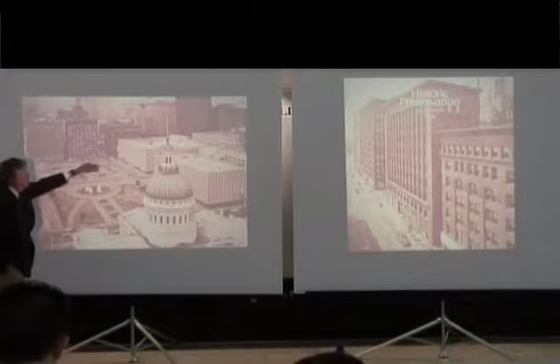And this is a great 19th century courthouse, two existing buildings, and they were scheduled when we came there in 1984 for a jury to see what to do about this building. These were slated for demolition, as was this one right there. And the very first thing we all said to the town and the state, because they were both involved, was don't touch those buildings, don't tear them down, leave them there.

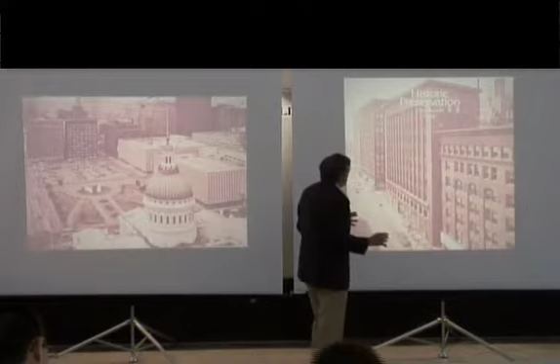Sullivan's building is meant to be seen in relation to buildings like that. It's meant to be seen, imagine it must be full of, you wouldn't see it this way. You'd have big buildings like these here, you come through there, and there it is, and you see it as a block. You see it as a chunk, and it fits right into the street. And it needs the pre-existing buildings, because while it looks like a solid block, wonderful palazzo block from here, it really is only a few bays deep on both sides. So if you tear those down, all of a sudden the whole character of the building is lost. But they didn't pay any attention to us, and they tore both those down.

Now, we saw that it was a basically traditional urban situation, the kind that Palladio handled so well in Vicenza. And the Palazzo Valmarana in Vicenza is like a model for Sullivan. Look, he's next to a building like this one, as Palladio was, on a narrow street like this.

He wants his building to be a little bigger, but he wants it most of all to stand out, so he does what the other building hadn't done. He has colossal pilasters that go the whole way and give his building a kind of unity and a kind of presence the other building doesn't have, but still gets along with it, doesn't hurt the street, doesn't hurt this building. It's that principle of the building being the same as all others, but decorated differently, which is what's so good about the Italian palazzo, which is what this model is.

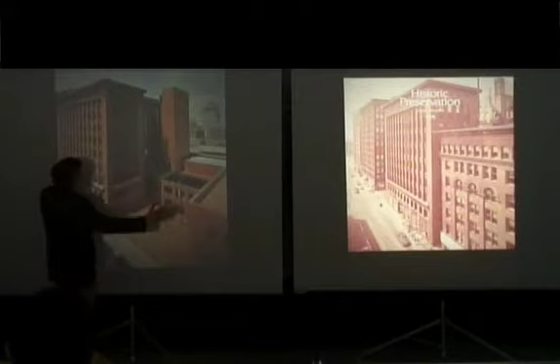Then, unfortunately, as I say, they didn't listen to us, and they tore down the buildings. And the building that won the competition, as I told you last time, really, we were wrong. It shouldn't have won. You see what it does. All this is completely undesigned. The building has lost all its volume. It's lost all its presence. It was never intended to stand free.

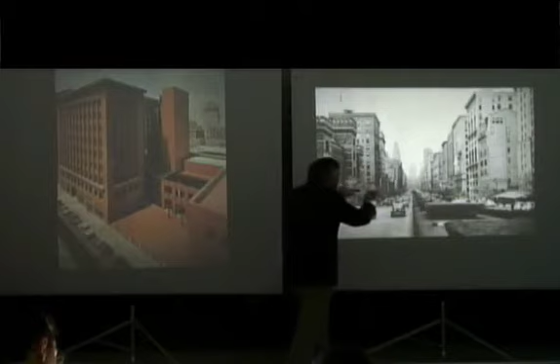Now, that business of tearing it down is something that they inherited from what had been happening in modern architecture at that time. And the worst example is what happened on Park Avenue, where you had Park Avenue as it existed with solid street walls, which defined it. And here we are, what you might call it, the military crest. And from there you got a shot all the way down. And indeed, Oldenburg did a great project where he's going to have enormous balls here, bowling balls, rolling down here. And you really feel that would be wonderful there. And then you had the tower here of the Grand Central System, the office building, and this is narrow, so the space continues. It seems to continue all the way down the avenue. Then you know what happened later. We'll talk about it. Pan Am blocks that.

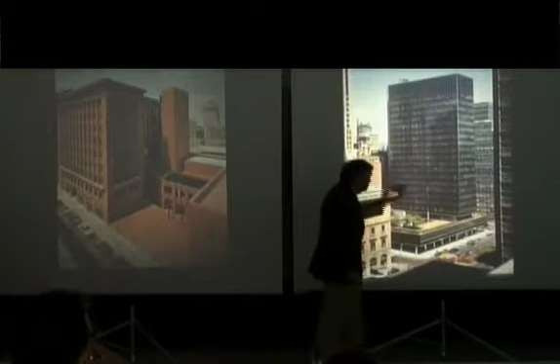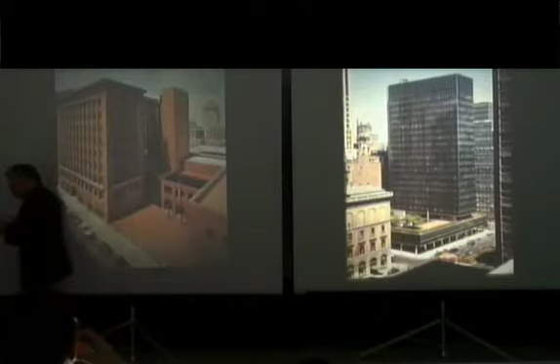But even before that, over here on the right, Lever Brothers, designed by Gordon Bunshaft, came along and said, look at me, I'm more important than the street. He takes it, instead of defining the street with it—the pre-existing building was about this height, not very tall, but still it was facing the street and holding it. He turns away from the street, puts a hole in the street, destroys the street to stand out, especially himself: my building. That is an example of not thinking in urbanistic terms, but in terms of small-scale Bauhaus design.

After all, they were trained to design in Bauhaus, most of all trained to design with little paper models. They folded paper. They worked at this scale. So things that look fine like that, like the Pan Am building, for example, as we'll talk about later, destroy the urban situation if the urban situation isn't valued. And they didn't value it at all.

Bunshaft didn't. They despised the Racquet Club and the rest of Park Avenue. But Sullivan, though he's determined to be different all this time, he's talking about originality all the time, it never occurs to him to destroy the urban, pre-existing urban fabric. Never comes to him at all. He's still working like Palladio with the basics of traditional urbanism, and he's trying to make his building stand out, but at the same time get along with the rest of the building.

So he does this great block. Now, he does that, of course, with Adler. Dankmar Adler is his partner, and Adler does all the tough work in the office. He handles everything, he handles all the business. Then designing the auditorium, he does the acoustics. Sullivan really basically just does the facades at this time.

And this is the last building he did with Adler, the last one in that partnership. It's the Guaranty Building in Buffalo, again, not in Chicago. Now, this is of 1895, and we might take it as the real climax of Sullivan's tall buildings, because you can see it looks a lot taller, looks a lot more energetically lifting vertically than does the Wainwright Building.

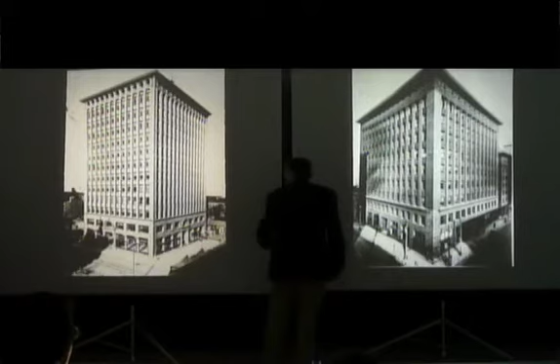The Wainwright Building is solid below here, and here it all opens up. So you can see that there are columns here, only every other pilaster. Then you realize that over here, he doesn't show you that, but it's the same thing. So this feels like a solid base and a pretty solid interwoven web and a heavy pediment. All this stands free, stretches, lifts up, turns up at the top, pulls back down again. The whole thing has a lot of energy in it, which he's somehow able to imbue it with.

Now, it looks as if it's designed as a freestanding tower, but it wasn't. As a matter of fact, these are the only two facades that Sullivan designed. The rest of it's just brick back there. What Frank Lloyd Wright used to call Queen Anne front and Mary Ann behind, and that's basically what you had, because this is what happened around it. This is what Sullivan expected—he expected to have other buildings go up around it, so that's all that you see.

Nevertheless, it does have that great energy. And it's interesting, it's as if he picked up the arch situation of the first of these types, the Marshall Field Warehouse. But then he gets rid of the masonry—it's light terracotta instead of masonry fireproofing. And then he picks it all the way up and brings it all the way down. And you feel these standing on legs here.

And the whole thing is exactly what Sullivan said it was. And when he wrote his Kindergarten Chats, he talked about the Marshall Field Warehouse, and he said, here is a man for you to look at. This is typical 19th century gender-centered criticism, but nevertheless it's empathy. Here is a man for you to look at who stands on two legs, stretches and stirs. In a world of barren pettiness, a male is again—gender sure—but the point is he feels it as a body which lifts, and his body is even more so.

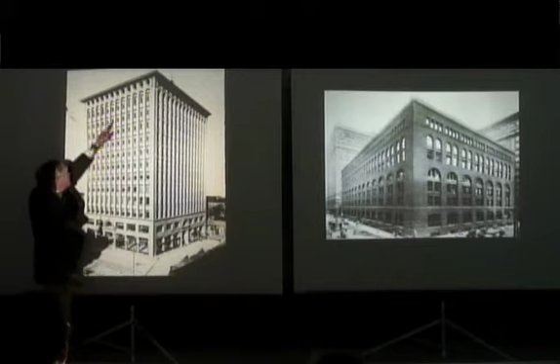You look at that, you feel it stretch and lift and stir. Now a lot of that is because of the thinness of that terracotta covering and the arches up above, and the kind of decoration that runs across it that looks very metallic and makes you feel the thinness of the steel, which you didn't at the Wainwright Building—the steel was inside. Now, I think he gets that from a very strange source, and I think it can be documented.

I think it's from the Irish manuscripts done in Ireland and northern England in the 7th and 8th centuries, before the rest of Europe had begun under Charlemagne to revive Rome. It was carrying on Christianity at the very edges of Christendom, doing it with a wonderful art that derived a lot from barbarian metalwork and from the old Celtic background of the North Britannic and Irish tribes.

Now, the most famous monument is the Book of Kells, which is in the Trinity College Library in Dublin. There are also the Lindisfarne Gospels and many others, made all the way from the eastern coast of England across Ireland.

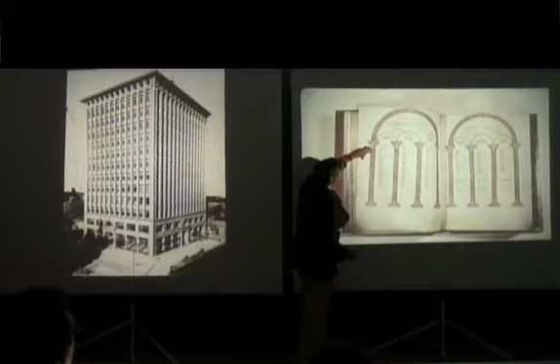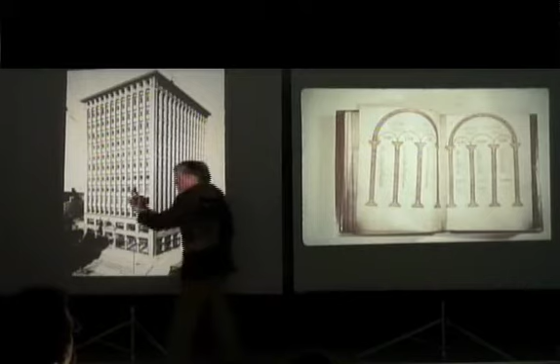Now this is a page, a canon page in the Book of Kells. You see what you've got: pilaster-like flat columns covered with a design that looks metallic. Then they arch over, with others inside, so there's this arch motif with thin, stretched, metallic-like ornament. The reason it looks like metal is that the manuscripts show the dominance of a technique of metalwork, coming from Celtic and barbarian metalwork.

And these figures are all little barbarian animal-style figures, all biting each other, all alive. Imagine you're in this cell. Out there is the sea. These monasteries are little places with the sea outside. You're in this cell, looking into the book. And remember, the book is an invention of Christianity, of the early Middle Ages.

In antiquity, they had scrolls like this, so you're outside the book. You get in like this, so you can be inside a book. You can lose yourself in a book the way you can't quite in the classic scroll, which is always outside you like that. So you're in that book, with that pen moving, and you see how metallic it looks, originally based on models of Celtic metalwork going all the way back to 1000 BC.

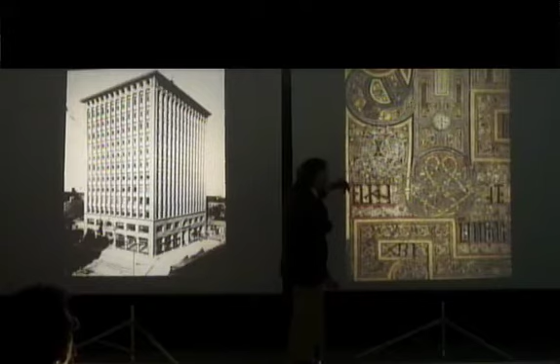So the same is true of Sullivan's terracotta, using that kind of ornament, it looks like metal. So all of a sudden you feel it's a metal building, which you didn't in the Wainwright building or any of the others. Now it's really metal. Still, it's fireproofed, it's covered. You see how it's like the Book of Kells, how it's energetic, and it's moving all the time.

And he's obsessed with it. It's wonderful, and these people will make it in the shops. It's a complicated terracotta process going on there. They do it with great joy, they love to do it. Look again how metallic it looks. See, it's stretched. It's really wonderful.

It doesn't seem very important. You're still in the palazzo model, not like Gehry or somebody rolling all over the landscape. But wonderful, tense, that thing is changing it intensely. Look at the difference: this is beautiful, but there you feel the flat masonry, the brick, the redness, the static quality, capped up above. This is just taut, your eye can't go to that except running up and down. Look, it makes your eye run up and down it. It really does, and it looks like steel.

It looks like metal. And even so, if you get down to where he exploits that most, where he strips away the masonry and shows you where the columns actually are, the really supporting columns, you get that stretched quality down below. Look at the details on the surface, where he has these little squares, which he turns like this and pulls to the point here where there's some compression right in there. He pulls it like that to stretch it.

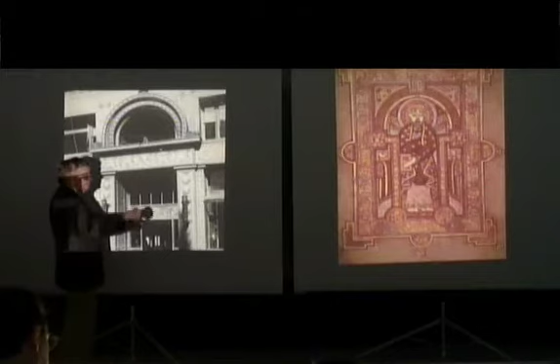It obeys the ornamental laws, not the classic laws of the figure standing in space, but the ornamental laws of that surface moving like that. And it all feels metallic. It's very much like it.

Now the interesting thing is that what happened to that Celtic civilization and to those manuscripts in the 9th century is basically that Charlemagne, the king of the Franks, became crowned Holy Roman Emperor in Rome in 800. As soon as he does, he's really ruling by this time all of Western Europe, down into Spain, where the Muslims are, and up way on through Saxony and so on. It was too bad it didn't stay that way, all one country under him. He institutes a classic revival, very consciously, in order to bolster the idea of the emperor and of the return of the empire and of order, finally.

Now, since that time, as you know, there have been hundreds of classical revivals. We're in the middle of one now, or somewhere in one right at this moment. The memory of classical architecture, we've never been able to get it out of the consciousness, no reason we should, of Western man. But that happened also in the 1890s.

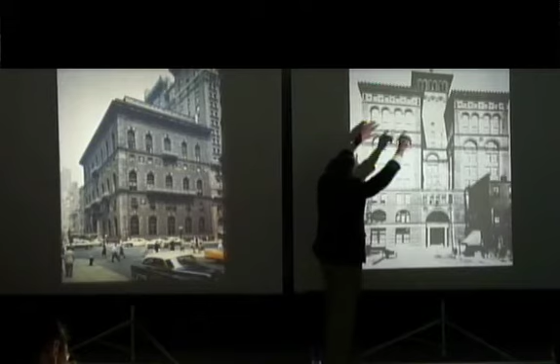Now, McKim, Mead & White, who I'll talk about later especially in terms of domestic architecture, they do some pretty good skyscrapers, and pretty early. This is in Kansas City—it's the New York Life Insurance Company by McKim, Mead and White, 1888-89. You can see it follows the model of the Marshall Field Warehouse basically, but it insists more on Renaissance details, especially in the cornice and various details right through here. So it has a flatter, thinner, more drawn quality than Richardson's warmer and stronger and wilder works, but nevertheless it's a pretty good building. But it isn't doing what Sullivan is doing.

What Sullivan is getting primarily from those manuscripts—you can feel how he must have looked up from his work and saw what was having great success, and thought, I am really doing something new. And what he's really doing is trying to make you feel, empathetically, compression and tension—trying to make you feel the building in your body, the quality of the way buildings work. And again, it comes from the manuscripts.

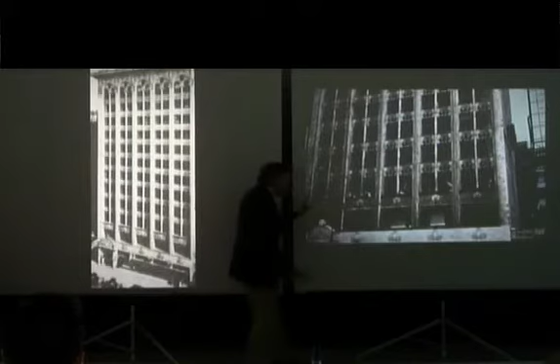It's coming down below, it's supporting, and finally the climax at the ground. See, he's turning it around, making you feel it come down on you, like this. These hold, and this comes and barely stops there. He says, I better take care, and he sticks that in like a piece of wood to brace it. It's really amazing—all the tension, so it's compression and tension. He's working in both, and he must be working very hard on this as he does it.

Or again, I already showed you the Gage building of 1898-99, same time basically, on Michigan Boulevard in Chicago, where these are by Holabird & Roche—they're all by Holabird & Roche, but they let Sullivan design this facade. He's no longer working with Adler. And look what he does: he hates this pragmatically arrived-at Chicago window affair. Doesn't like it. You can see why not.

Here, the weight of these, unsupported here visually—if you feel that as compression, there's something really wrong. You can hardly look at that building that way. So he won't let you do that. He makes your eye go there, to those, to the big clasp, and then he hangs these like that. So it doesn't matter that there's nothing here. But he beefs that up anyway, so you really feel there's something pulling down there.

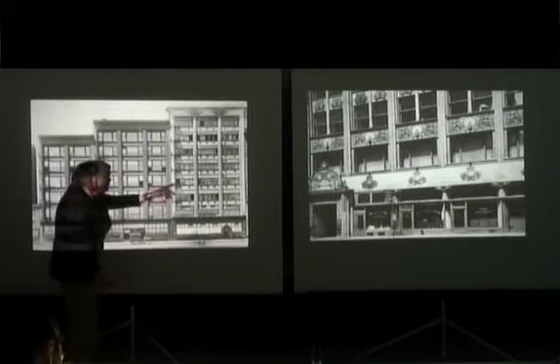And then in here, to make you feel that even more, he completely confuses that proportion of the bay. He has a thicker spandrel here with terracotta, then he has dusky glass here, then the mullions are small like this, and he has a horizontal window instead of this Chicago one. So the whole thing is like a Venetian blind, rattling down—held up there and rattles down. He turns it right around, it seems to me.

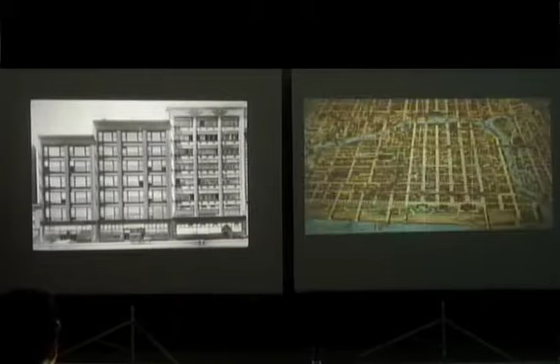Now that is in a wonderful spot, too, for that—on Michigan Boulevard, it's about, let's see now, this must be Congress Street, about here.

It's out of focus, Renee. You're watching.

This must be Congress Street about here, so this is along about in here. But if you just go in past the loop, which is right there, that's where the train is coming around, go back to State Street, right in there, right in one of those corners, right in the heart of it, that street that's rushing down through the loop. You get another building behind, which is the Carson Pirie Scott store.

Now you see that's designed a totally different way. That's not designed as part of a frontal panel to make you feel it coming down like a screen, or another frontal panel to make you feel the compression and tension.

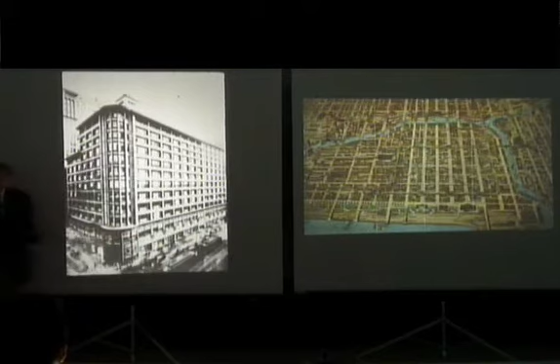This celebrates the street, the dynamism of that new street, the dynamism of that big commercial street, which now in 1899, where he does it up to here, then 1904 when he adds that much, is beginning to fill up with automobiles rather than with carriages. So you begin to get a real sense of speed and power and danger and excitement on the street.

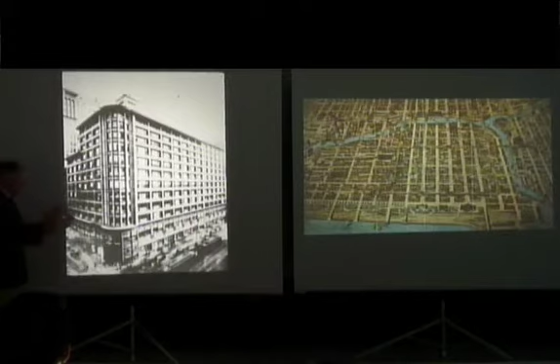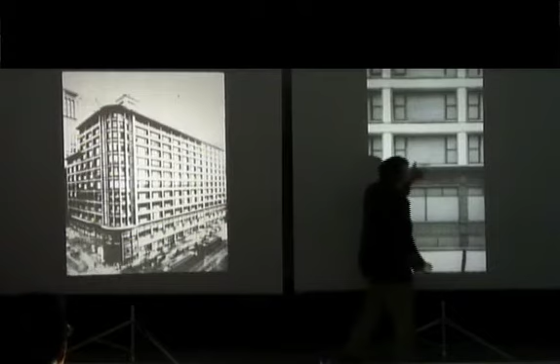Now everything about it he handles just the opposite of the way he handled the tall towers. He doesn't disguise this at all. Instead, he exaggerates the Chicago window. The proportion is set by Holabird and Roche, but he makes you feel that it is very horizontal. And to make you feel the horizontality, he continues this band of ornament. So you have to read it this way.

And then down below, here, with this iron metalwork across this, over that string course, that doesn't look supporting at all. That doesn't seem to have any steps of structure that would hold it. It's just a negative plane. You see it there, it's all right on the surface. And the glass is right on the same surface. It's absolutely thin, like this.

So you feel those come, and they come to the corner. It's really wonderful, I think it's Madison Street. And then it's like somebody shifting gears. It opens up, and then it just balloons. I'll show you a detail of this later. It balloons out in glass and a web, a thicket coming out the corner, which is your place of entrance.

Which is really marvelous. Philip Johnson wrote a very dumb article back in the middle 50s or early 60s about how Sullivan's ornament was a holdover. Same thing Giedion said. It wasn't a holdover. As you see, it's essential to him. It's what he's working with. He's making us feel the whole building with the ornament. And because he's doing it with the ornament, you see, the building still fits where it is.

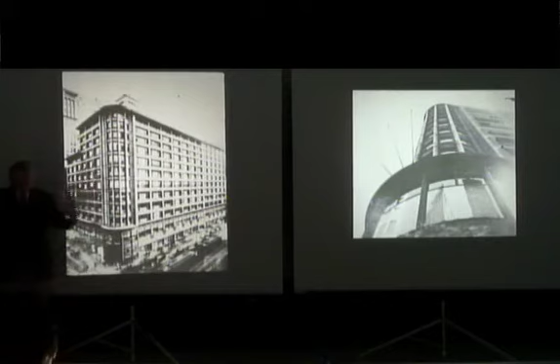He's decorating construction, not building decoration, like most of the over-designed buildings of the present day. And that's an old 19th century adage: always decorate construction, never construct decorations. It's really a great thing, and that's what he's doing.

Now at the same time, he's completely remade the type. It's really great, but you can see how it's been incremental all the way. He's been respecting the problem, the approach, the street, the whole problem, the whole way. There's that dark, solid, heavy block of Richardson's, and now this is all light-colored and dynamism.

And of course I thought about it too. See, these are all carriages back there in 1884. By this time, by 1904, they're mostly automobiles. It's a different world.

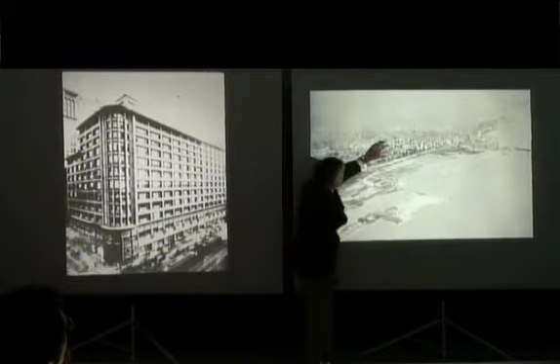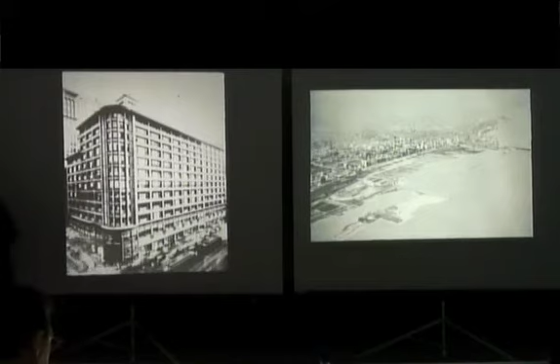Now on the other hand, there are other worlds too. That's not the only one. There's the loop, and there's that long stretch back here. You come down the river to South Chicago, down the lakefront to South Chicago, and in 1893 you get another world. And it's a great vision. It's a vision far beyond anything that Sullivan had in terms of changing an urbanistic situation, to make a new kind of city. And that's, of course, the World's Columbian Exposition of 1893.

And Daniel Burnham, the great Chicago architect, his partner John Wellborn Root, dies the year the fair opens, '93. Burnham is alone, does more and more planning as time goes on. McKim, Mead, and White come from New York. Richard Morris Hunt, the Dean of American Architects, is given the administration building design where we're sitting here. They all lay it out together, and especially Frederick Law Olmsted, the older one still at this time, lays it out. And it really is, in a way, like the plan of Vaux, in the sense that you're meant to come in there, ideally.

Most people did come this way, but you're supposed to come down in boats, and a lot of people did. They debark and come in this entrance and look down this way. You see you have a long axis, then the transept going across, but now it's water down the middle, the parterre on the side.

And indeed, the buildings, it seems to me, are like the forest in Versailles. They're like the park, the solids with all the wonderful things hidden inside them. Machinery Hall, this enormous building, one of the biggest ever built at that time, and all the others with their wonders inside.

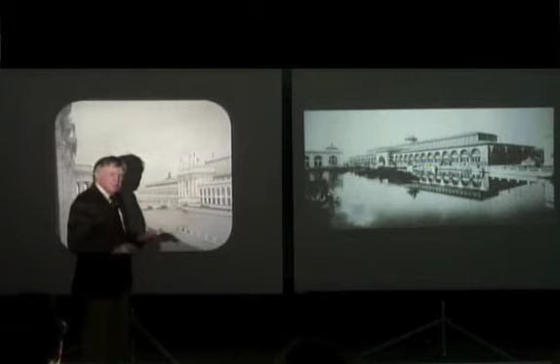Now, Louis Sullivan, writing about this much later, said this set American architecture back 50 years. He might have said it set his own practice back 50 years, but it didn't set American architecture back. Also, how does one judge him or his motifs? Here he won't play—now, designing a town, building a town, and he just won't do it. His Transportation Building, he would not make classical. He said he wouldn't do it, he wouldn't paint it white, he painted it red. By painting it red, is he trying to show socialist opposition to what he would have called the feudalism of imperialism? I don't think so.

So in other words, he paints his building red, makes it stand out. The modernists, of course, all hailed him for that 40, 50 years later. But should we really? I don't know.

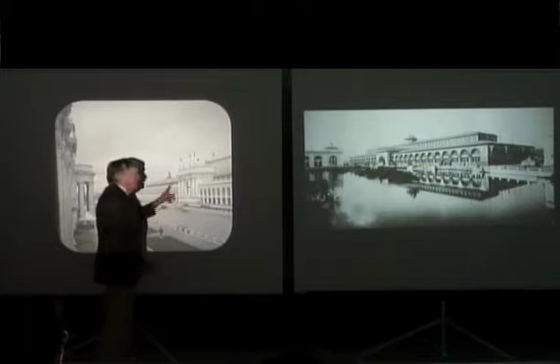The fact is that his building is a transportation building, and the way he increases the sides of the arcades and has a big arch may give a sense of dynamism that he wanted to create, which he felt would be lost in white. That's possible. On the other hand, his building isn't that original compared to the others.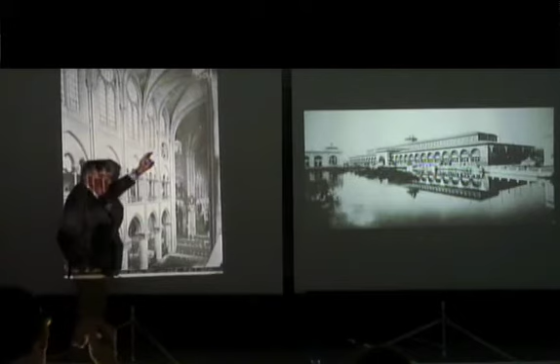For example, if you look at the nave of Notre Dame of Paris, when Viollet-le-Duc took it over to restore it in the middle of the 19th century, all the bays were like these. This is the way Chartres finally turned out to be. But he decided that originally, before the flying buttresses were added, there was a four-story elevation like this—a very weird one, with the grand arcades and the tribunes. And then this is a rose window where no rose window was ever meant to be. It's under the roofs here of the clerestory, so there's no light from it, and then tiny clerestory windows.

That's exactly Sullivan's elevation inside. You see the great space here, the tribune space, the rose right here, and then the small clerestory windows up above. So it's clear that he too has his models—which is nothing against him, nothing against either one.

That is, they didn't have the plan. Burnham had the plan, and that plan became this great City Beautiful plan—the one he proposed for Chicago in 1909. Now, I'll come back to it in a minute because I want to talk about its background. But just take a look at it and see what it does for Chicago.

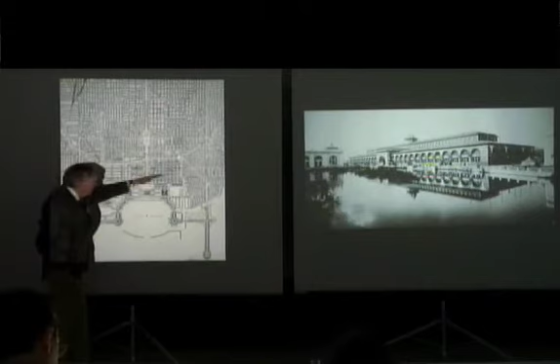Originally, the railroad is here and the lake is there, so there's no green space—no park, no green. It's all been squeezed out by real estate. So he gives it a great park there, a French parterre right there. He gives it back the lake. It's a great thing. It's a wonderful thing.

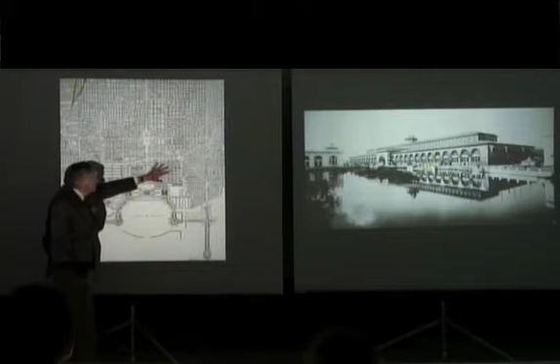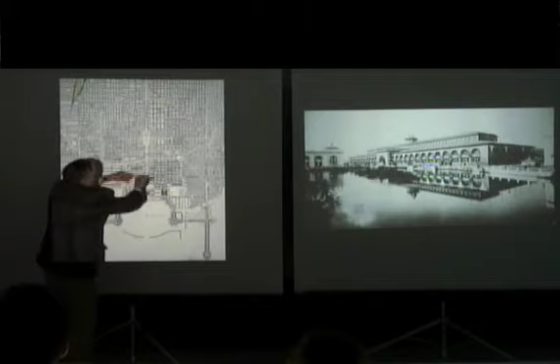It's right there. Then where we saw already where the loop stops and then there's nothing, he puts the great center out there. And then he surrounds the grid of the loop with the diagonal boulevards out into the space of the City Beautiful movement. And you can see it—it's a wonderful conception. Very simple, and it's wonderful.

It's great. Now, I'll come back to that. And of course, we know where he gets that—it comes from Versailles, fundamentally, as we've already seen. It comes from Le Nôtre. And then from Washington. And it's about Washington I'd like to talk for a minute.

City Beautiful Washington. Now, remember, Washington is designed by L'Enfant, basically for his commander-in-chief, George Washington, who'd been an officer in the Army during the war. And Jefferson, you remember, had proposed right here a tiny little grid town on what he called the Tiber—which is called Goose Creek—looking down toward the grid of Alexandria down here. But L'Enfant's conception is fantastic.

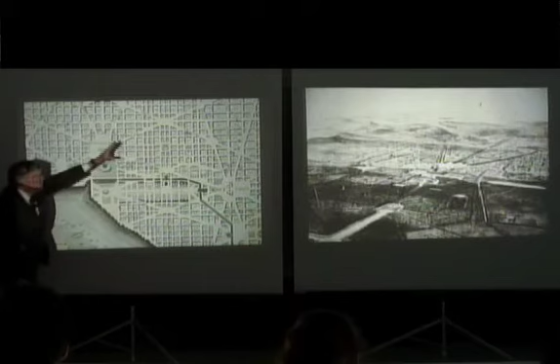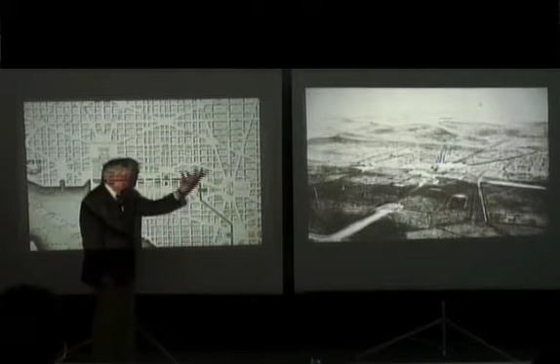It's like Versailles—it's regional in scale compared to this. And we're showing here only the center of it. Now, here's a great plan. What does a plan like this take? Well, it takes generations—it takes a century or more to fill up, to grow. So it's a long-range business, as you all know. And it's very clear what he's doing: here's the Capitol, which is on the height. There's no doubt that it's considered—Congress rules, supposedly.

Congress is on the height. Then the president is over here in the White House, lower down. He's an integral part of the system, but the height is there where the Capitol is. And they're connected by Pennsylvania Avenue, which runs out to where the entrance to the White House is conceived to be. Then the famous Ellipse Park is like this.

And some kind of monument, eventually the Washington Monument, was supposed to be right there in axis, because later, when these monuments were built, they didn't like the situation of the soil under the ground, so they moved a little this way, and that axis never developed. It's a little bit off it, like this.

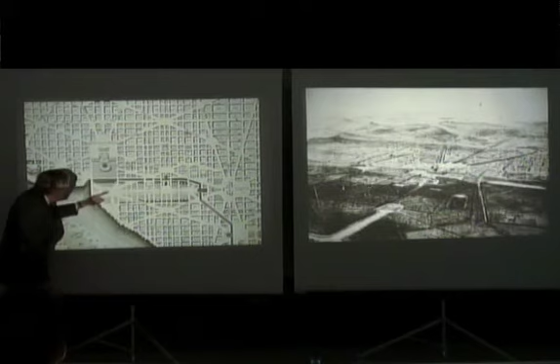Then the other thing is Pennsylvania Avenue and the Mall, and that's the heart of the whole conception. Now that grows up, as you know, very, very slowly, with Hoban doing the White House and Bulfinch, Latrobe, and so on doing the Capitol.

And say about 1850, it looks more or less like this. And even there, he's exaggerated the size of the dome looking toward the Capitol from the White House, because the dome was really pretty much like this, a fairly low dome. And there's Pennsylvania Avenue.

Then what they kept doing throughout the whole century up to the 1860s was to expand the building laterally with the big office buildings of the Senate and of the Congress. And the Mall kept getting encroached upon—here's still Goose Creek, you see, still very obvious—but they always proposed the Washington Monument down there.

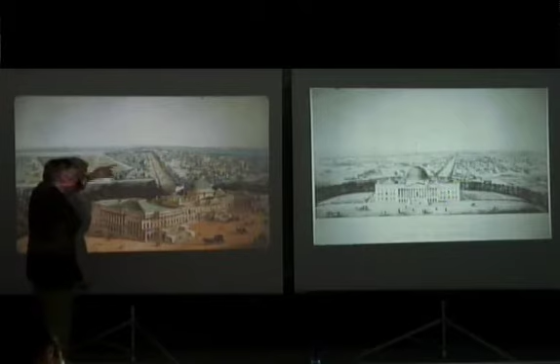And they often drew it like this—this is by Robert Mills—but it was never finished. It never really looked like this. It was intended to be this truncated pyramid, sort of a circular column down here at the bottom. It's supposed to be right at the axis of the Capitol, right up there, but it never really was like that.

But by the time they got like this, in the work of Thomas U. Walter, by 1859, the dome really seemed much too low, that great horizontal stretch. So they proposed a very tall dome on a very high drum, but they proposed the drum so high, and the whole dome was supposed to be so high, that they couldn't build it. And it stayed like this.

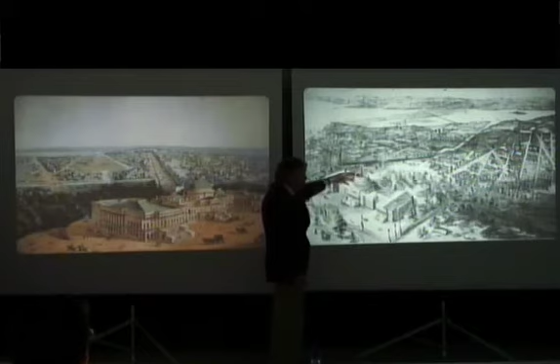Unbuilt, through the first terrible years of the Civil War. And while they were losing all those terrible battles like Chancellorsville and so on, it looked as if Washington might really go, the country might go—this was always an example of the country being incapable of finishing its capital. It was standing out there.

But finally, Walter worked out a way to do it in cast iron, so it could be much lighter. So this is his beautiful drawing of it, where he makes these great cast iron open-work trusses like this. Therefore, you're able to have this great dome. You see what they're doing? They're pushing classicism beyond anything it was ever intended to be, to fill the symbolic needs of the place and the bigger scale of the new place.

And is that wrong? Is that expressing the structure? It's doing something much more important. It's trying to express an idea. It's trying to create the place.

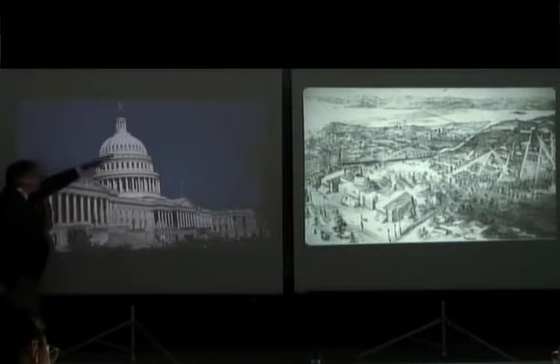And as soon as they get it up there—this is about the time of the Battle of Gettysburg, just about this time, in 1863—they managed to complete it, and the figure they put on top was the figure of Freedom there.

So now you had, then, miraculously, in the 1880s, when they had a competition to replace Mills's design, which had never been built anyway, miraculously this wonderful, clear image, this great obelisk pointing to the sun, was chosen, which is very odd at that time, when the design tended to be very fussy and highly elaborate, and all the other entries were deeply complicated. All of a sudden, this pure image, beautifully setting off and complementing the dome of the Capitol, appeared. And this was the structure.

And you see where the Potomac came, right here. This is just as far out toward the edge as it could get, the point, but it's not on axis, you see? The axis of the White House, and there's the ellipse, comes across like that.

So then, that's the way it stood in 1900, when the American Institute of Architects had its annual meeting there, and full of excitement for the whole thing, they organized the McMillan Commission, full of excitement over Chicago, really, which is what had done it, and they proposed this.

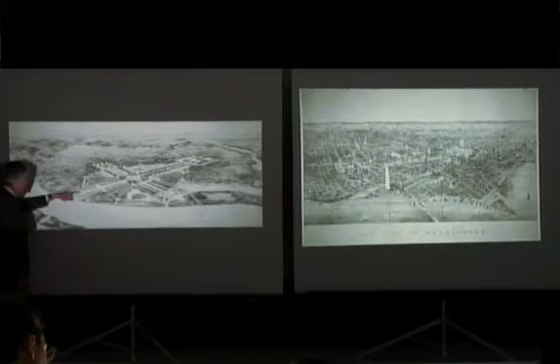They proposed to really clean up the mall, have a very strong axis crossing here, even though it missed the monument, from the White House to a monument to Jefferson over here, then have a long reflecting pool coming out to a monument to Lincoln here, and then a bridge going across to Arlington, beyond which is the Lee Mansion, the great antagonist right across the river, looking back on it—this great Doric mansion which was Robert E. Lee's home. Well, they couldn't work it out quite that way, largely because this axis is impossible.

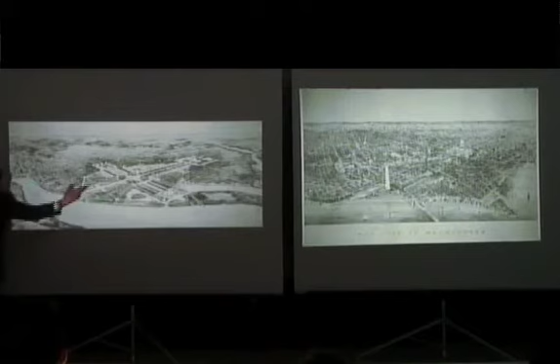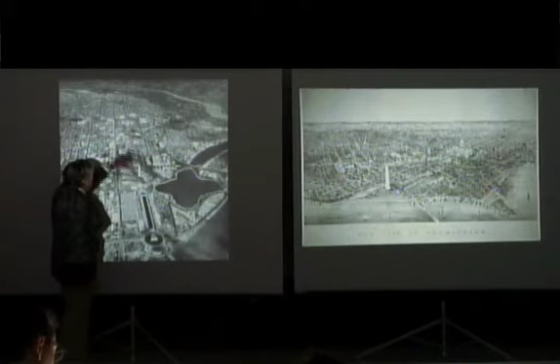There is no axis thing on the top that makes much sense, but nevertheless it worked out finally this way. They did fill out all that part of the Potomac, and they had the reflecting pool and the Lincoln Memorial and the bridge to Arlington, and the big dome of the Capitol now dominates the whole thing, and the radiating avenues of L'Enfant go out and are added on to, and so on, out through here, and the White House is here, and eventually, under Roosevelt, the Jefferson Memorial is built over here, more or less right on axis with Roosevelt's bedroom.

Everyone has said it's put there so Roosevelt could see it, and it's really true. From the White House, you can look right there, and he stands out under that dome perfectly clearly.

But the great axis, of course, has always been this one. Jefferson has always been just a little out of it, because curiously the iconography of Washington is very martial. It's very military, and it very much has to do with the Civil War. The Civil War marked it, just the way the Civil War marked this country, even to the present day. All through this period when they were working this out, around 1900 and the generation after, it's always the Civil War.

The great figure right here under the Capitol who starts to look down that axis is the figure of Grant—Grant defending the Capitol, looking toward Virginia this way, looking toward the Washington Monument, then his commander-in-chief down there, and then Lee across the river right over there. And I think it's a wonderful monument.

He's on a plinth, and infantry is coming up under him, marching on the plinth. Cavalry is coming from one side and artillery from the other. You know, Grant was a great horseman. I mean, though he never dressed up like Jeb Stuart and so on, wearing his old private's blouse, he may well have been the best horseman in the army.

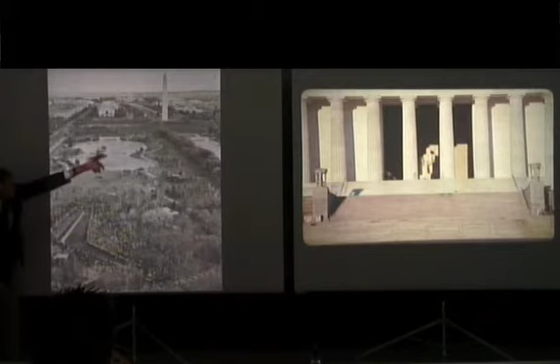Finally, he looks all the way back to his general on horseback under that stretched dome. Now that's exactly what Burnham wanted to bring to Chicago. He wanted to bring, out beyond that tight grid, this other vision—the vision of the government, the federal government, America, more than just the Middle West, more than just the tight buildings down in there. So he has this grand stretch, again, it's like St. Isaac's in Leningrad and St. Petersburg—much too high for proper classical architecture, but able to stretch itself to the demands of the age.

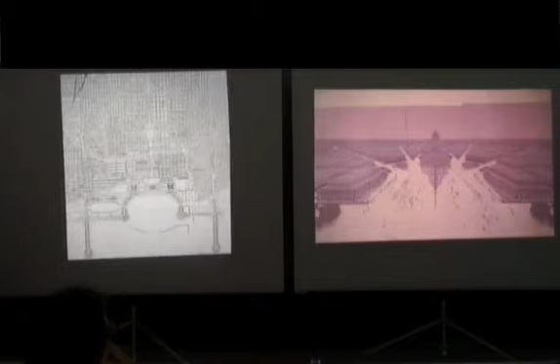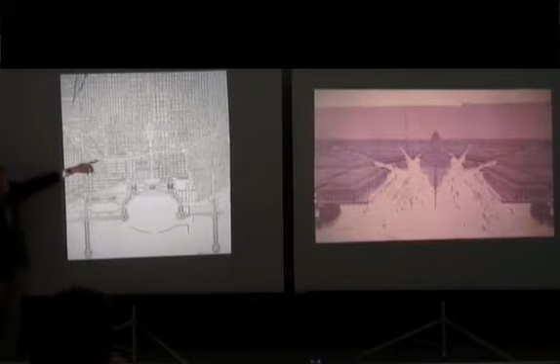And the plan, as I said before, is just right. There's the lakefront, there's the closed grid, there's the big space. Those boulevards, of course, some of them were already in construction in Burnham's time. All of them are still in use—it's a wonderful way to get around Chicago up there, and they're still very nice.

His drawings are beautiful, his ideal boulevard as he shows it here. The whole idea was to get out there, have a center, make a statement, and open your arms around it. That shows you, for example, they lost it. We lost all that—they didn't build it, of course.

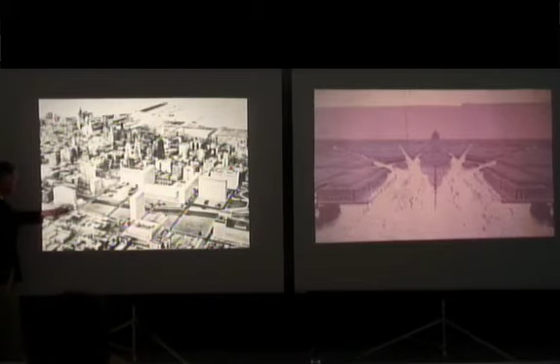Later, in the 30s or maybe the 50s, they wanted a civic center. Look what they did—they retreated from out here where you had to be, and came right to the river and into the loop. What does that do? What's it saying? Nothing. Nothing.

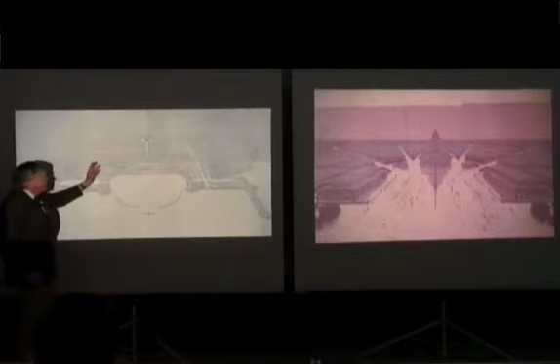Like this, his real vision was right—see, there it is, it's ghostly. It's a great drawing, ghostly. It stretches out the fields of the Republic endlessly, like that. And then the wonderful garden, the river, and the thing. It's great, as I said before. You can see it's exactly what Chicago needed, and it's too bad it didn't get it. Out there in the space, though, thank heaven it did get the lakefront.

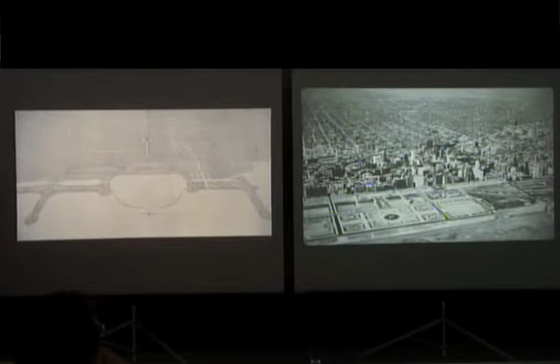Now, of course, with the lakefront, Michigan Boulevard comes into its own. It really becomes one of the great streets in the world because it's got a front on that great lake, the great garden, and these wonderful things. And you see that's the beginning of the Holabird and Roche skyscrapers, with Sullivan's building, part of the whole thing.

See, they've added some stories to Sullivan's buildings, but not to the other—they love Sullivan's building. Okay? And there you are.

And then where Sullivan's Auditorium building is, like this, that's where Congress Street was going to be widened from the Civic Center, coming right down to the center, as was proposed at this point. So this building is right there, and they did widen the street, as I'll show you later. As a matter of fact, the sidewalk is now where the building used to be—that used to be the bar in there, now it's the sidewalk. So the building comes down to where the cars are, like that.

And you see, you would have seen it down there—you would have seen the great dome in the distance beyond the whole thing.

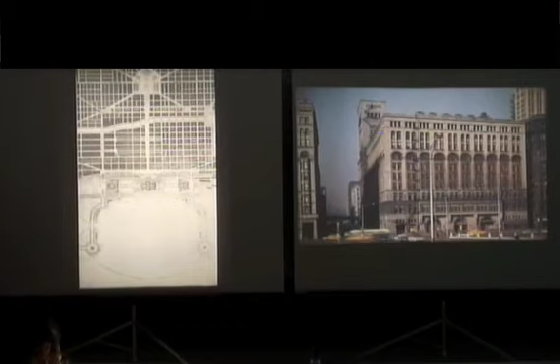Now, the Auditorium, which I mentioned before, of 1888, '89, is really a marvelous building. When I saw it, right after the war, it was a ruin—it had just been taken over by a community college called Roosevelt University, and they didn't have any money to fix it up. You come in that wonderful lobby you see down there, with the arches. It just engulfs you.

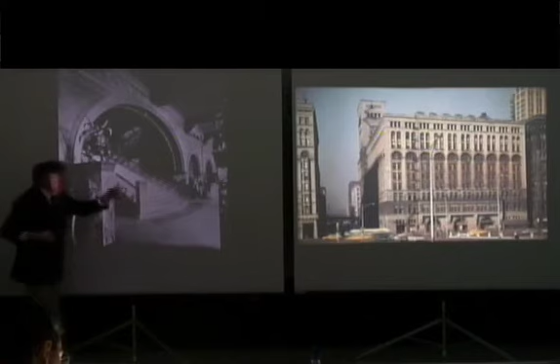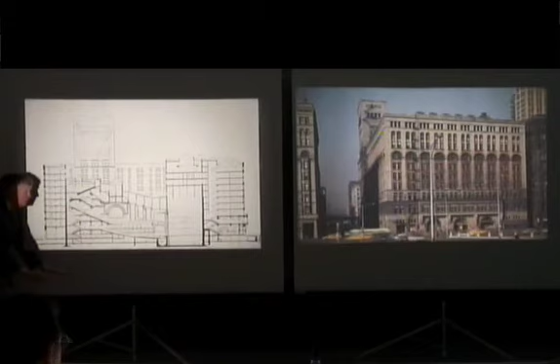Go up there, and then most of all you see that great tower. That great tower is over an enormous void. Imagine, while they were building this down in those muddy foundations, they had to know that part of it was going to be heavier—heavier over where this great theater and opera house is built, right like this.

Now, this doesn't look like much to say, but the stage—I stood on that stage and looked up. At that time it was a ruin, and I could hear what Frank Lloyd Wright said in another connection: the drip, drip, drip of dirty water coming down through it.

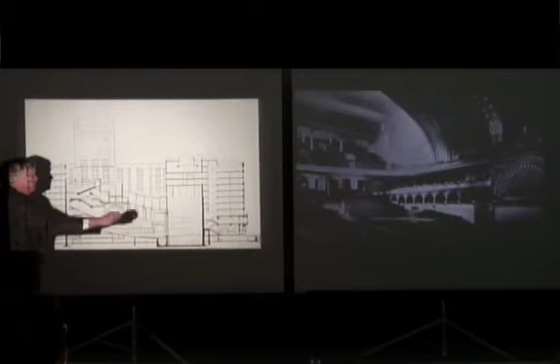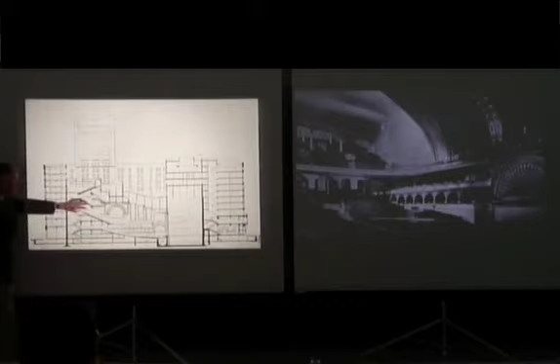Now it's all restored. The great thing about this is it's the first great democratic theater. And I say democratic in this sense: previous programs for theaters, especially opera houses, had all demanded getting as many boxes as close to the stage as you could—that was the whole trick. Here they say, no, no, no, we want the people, great masses back here. They have screens that can be let down, used to close it off, but you can get way back there.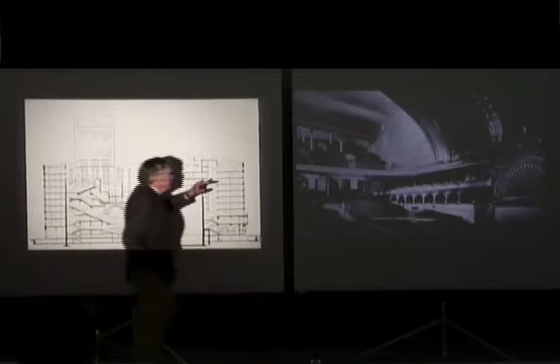In order to do that, the acoustics have to be perfect, and that's where Adler was great. I sat back there, and people speak down there—it's perfect, it's like a Greek theater. It's perfect, it's really there. It's a great thing in there, this thing itself. It isn't just a big theater—it's the first of an important theater.

And then, of course, right above it rises the architect's tower. In the tower, he really gets thinner and tauter. He had a lift like this.

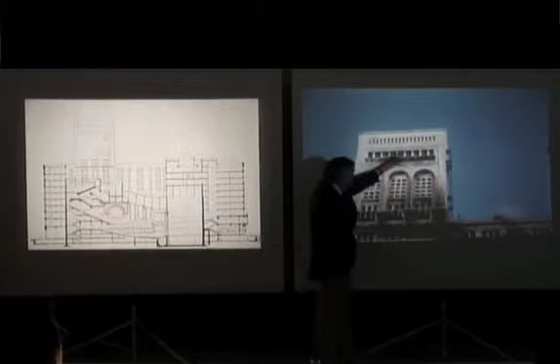And here's his office up here. That's where Frank Lloyd Wright and all those other people used to fight and hit each other with T-squares, and all the things that Wright describes, perhaps mendaciously, about it. The architects are the kings of Chicago, in the way they still are to the present day. You get any taxi driver, anybody, he'll talk about architecture.

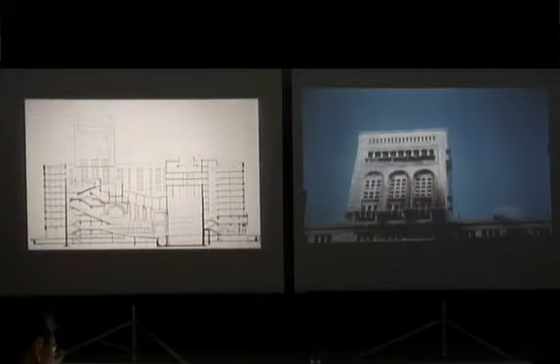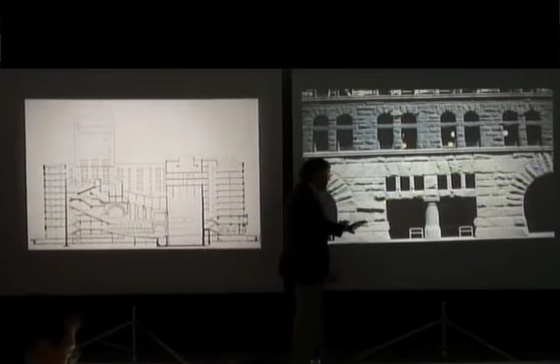Then down below, it's really kind of wonderful where the street is. It's where the bar was. So there used to be glass and so on in these, but now there isn't any. It doesn't have to be. So you get this wonderful rustication, very primitive, down there below.

Now, after 1988, you just had to come a few blocks this way and cross Congress Street, cross State Street, which is where Carson Pirie Scott was. This is Congress, and you'd come to, oh yes, here you see the whole thing. Sorry, I should have shown it before. Now, all you have to do is come down, that one from there, this way, and all of a sudden you see them again. And this is the Harold Washington Library, Public Library.

Harold Washington Public Library, of which Tom Beeby won the commission in 1988. And I happened to be on the jury. And it was a death struggle to get it accepted. But you see what he's doing? He's trying to be contextual.

That was the great period for that, of the 80s. And he's trying to pick up the Sullivan motif, it's down there at the end. Then also, he basically, in the basic body of the library, which goes up above, he picks up the tower. That's the way those pilasters, the thin things like this, come out here.

Now, it is interesting because this is this public space down below. Then you have 4 or 5 floors, which are all open through, except in here in this space, which is actually hollow. It's not real thickness of the wall. You have these little studies, which are secret.

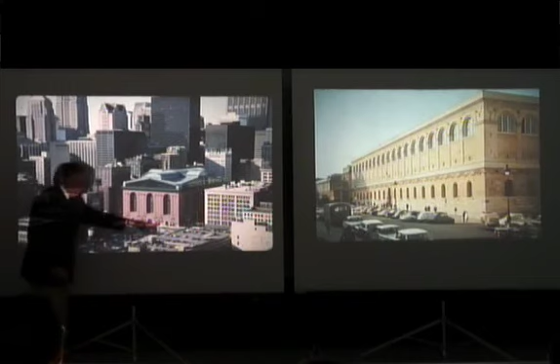You see, it really picks up that. And finally, there it is. Now, there's a lot behind it besides Chicago, of course. In terms of the arcuation over the lower floor, it goes back to the first modern library, the Bibliothèque Sainte-Geneviève that we talked about. It also alludes to one that I haven't talked about, the McKim, Mead and White's Public Library in Boston of 1888.

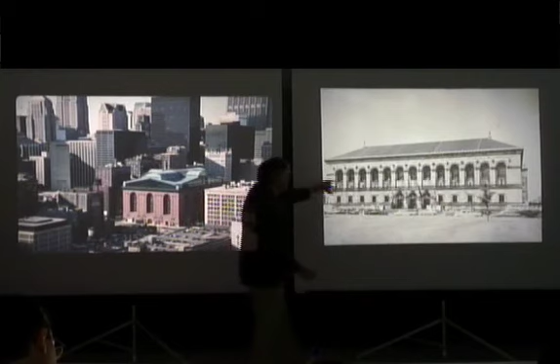You see what they do. It's kind of interesting. They take the Labrouste design, which is very tight and closed and has only one entry there in the middle, and they open it out. And they make it more Roman. They give it depth in the arcades up here. It feels more Roman, give you 3 openings like this. It's much more generous, much freer, much more open than the tight French one.

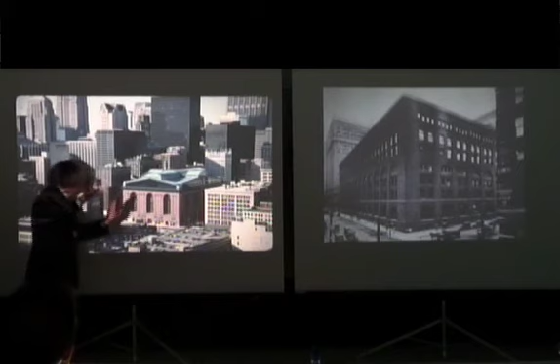Tom has some of that, but all of that here is adjusted to the loop. Because where he is on Congress Street, right here, is really the south facade of what the Chicago people feel is the real loop, which is the part that goes north from here. Because the train is right in there, it's right behind the building. You see in the moment, it's coming in between those buildings here, like that. And it's really on the south facade of the loop, so it picks up the scale of Richardson, the scale that Richardson had set, and which this Chicago school building has right there.

Then it's sort of the facade of the loop. Right behind it is the train. And it comes right up here, perfectly scaled to its basement as it comes through there. And there's a stop there.

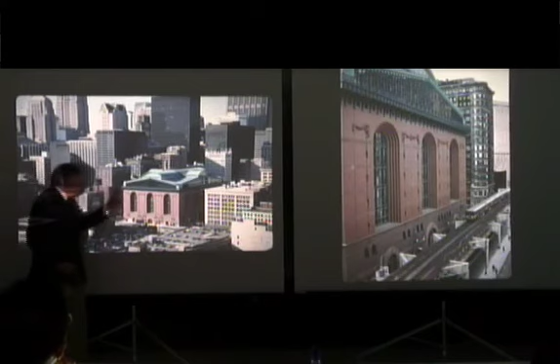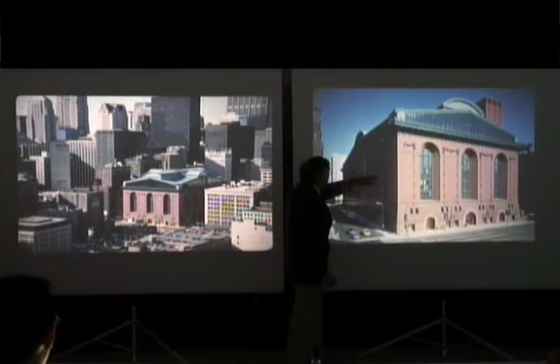Then on the other side, you can see it's close to an alley, which is much narrower than the bigger street, which is over here. And on that side, Beeby took advantage of the fact that it was tight in that alley to have that facade be all glass, which means all his services are here in his offices. He can change them as they like, and they always have light. But they don't impede on the gallery, on the library spaces, which are on the other side.

Now this represents something very important you should think about. For a lot of public buildings, the government forces you to use, I think it's 1% of it, for art. So what they usually do is they get done with buildings and they say, we'll get Joe's so-and-so to do a thing, a piece of sculpture, we'll put it somewhere. Tom wanted to use it in a more integral way, like the Greeks. He wanted it to be an integral part of the building. So he's able to get that worked through.

Now you also see that it really sums up everything. I mean, talk about Tom really summing up, and Beeby knows Chicago probably better than any other architect in the world. All of Chicago we've talked about. There's the Loop with its chunky buildings. There's Burnham's Plan, or its ghost, going down to the lake into one of Sullivan's great buildings. Most of all, there's that quality which really is the Loop, which is the buildings, those skyscrapers, are not very high. They're chunky, rectangular blocks. And where the big buildings appear, you see them over there, the newer buildings in Chicago, they're of a different type. They're of a type who grew up in an entirely different place, and that is in New York.

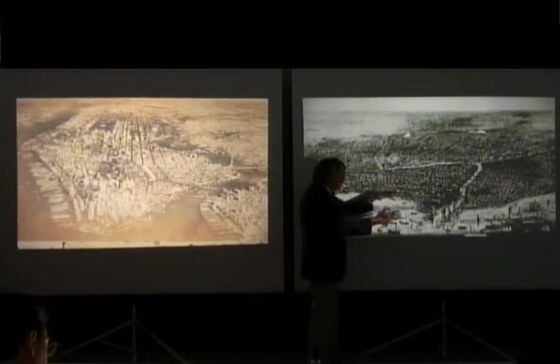In Chicago, with this grid in the Loop at the side of Lake Michigan, they never really thought about being seen at all. They thought, as we've always seen, about rentable space, bay width, maximum size, and traditional urbanism, basically, grows up there. And Beeby sums all that up. But in Chicago, you also had these block buildings. There's the Marshall Field Warehouse, for example, in Chicago, because they're on a grid. The grid dominates, the grid becomes Chicago, as we've seen.

But you see, that's not what New York has. New York's grid is only way back beyond, north of the place where the skyscrapers are built. It's a very different kind of grid, and it's not laid out until 1811, like this. What you have down there is the old Dutch town, and that town is irregular in shape, and Broadway runs diagonally through it, and the Battery is down here, and Wall Street is a wall right there.

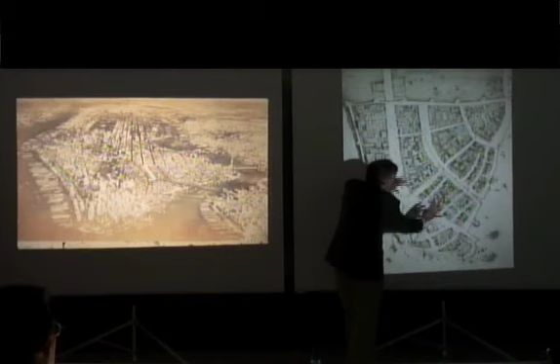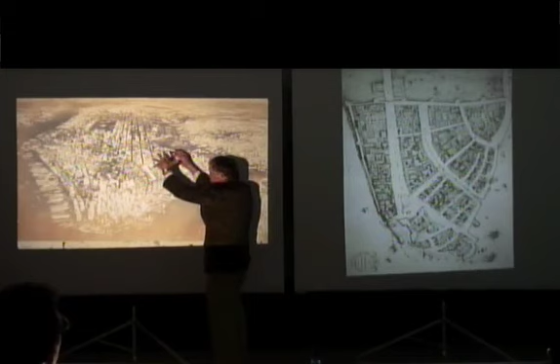So the skyscrapers, when they come to be built here, like those here, tend to take an irregular pattern. And as things are in that relationship, they tend to grow up in one great pyramidal pattern there at the end of the island. And we'll talk about that next time. Thanks.